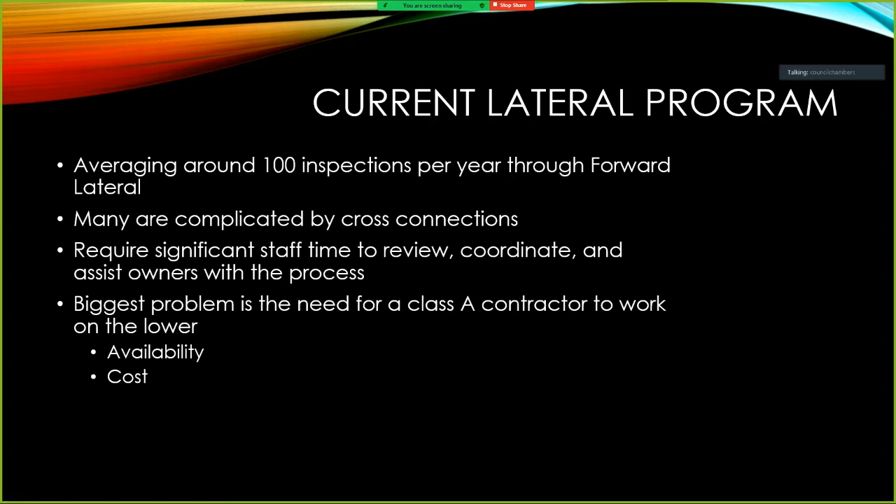So we do have a lateral loan program where the city has been assisting with the costs of replacing the lateral. That applies to both the upper and the lower. It's currently a 2.5% interest rate, 10,000 max, and a 10-year term.

With the recent cost increases, there are times where that's not covering the costs. I've seen lower laterals through the Class A contractors as high as 27,000. Now that was a fairly long lateral, and it very much depends on retaining walls and what's in the way, and the depth, and all of those sorts of things. But combined upper and lower lateral, in some instances 10,000 is not covering it.

We've also done what's called an annual aggregate project, where we basically tell folks, okay, you have to replace your lateral, but the lower, we understand it's a big cost. What we'll do is we'll put your name on a list, and then when we get enough of them together, we'll bid it as a city project, the hope being that we get some economy of scale, and that maybe by bidding a whole bunch of them, we could pull a contractor from out of the area that can do pipe lining.

Or maybe we already have a contractor in the area doing main work that we can sort of tack that onto their project and get a better cost than the homeowners would get going individually to a contractor on their own. We did that once. It did yield some benefits, so that model does seem to work. But it does require a lot of coordination and getting everything squared away and making sure that everything gets paid at the end when it's all done.

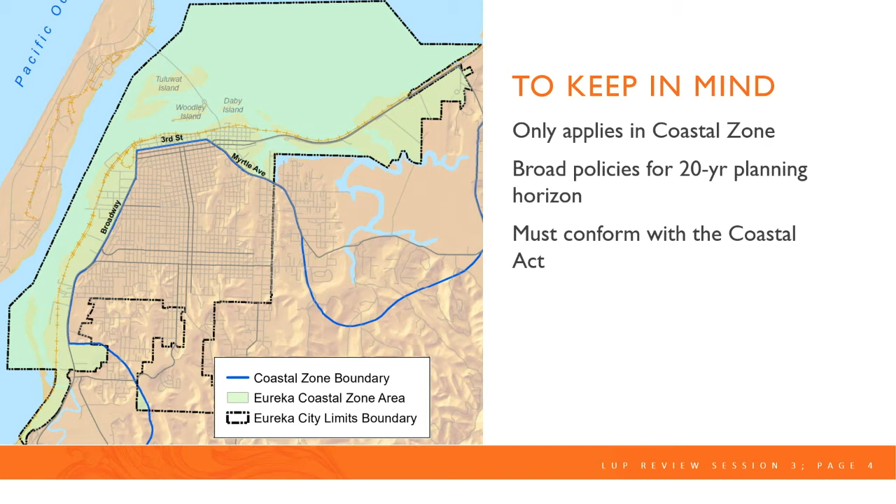Staff is proposing 6 sections in this chapter, and there's a lot of policies, so I'm just going to cover some key highlights. The first section is water quality and hydrology. In the general plan, the goals are what we would like to see; they answer that question: protection, enhancement, and restoration of water resources, as well as improvement of water quality. This is a duplicate goal that's already in the natural resource chapter of our general plan.

We got comments back from Coastal Commission staff in review of the chapter, and they wanted us to incorporate Coastal Act policies directly about marine resources and water quality. So we did that. They also told us we needed to add stormwater control policies. We couldn't just cite consistency with the state MS4 permit and our existing city stormwater ordinance, and I can explain the reasoning for that.

We added draft policies to address stormwater, and they have model policies that they wanted us to add that are really long. So we kept the substance of them, but we made them more like general plan policies, to keep the details for the coastal zoning code.

The second section is about environmentally sensitive habitat areas, implementing Coastal Act Policy 30240, which has two parts. The first part is basically limiting any development in an environmentally sensitive habitat area to uses dependent on the resources of the habitat area.

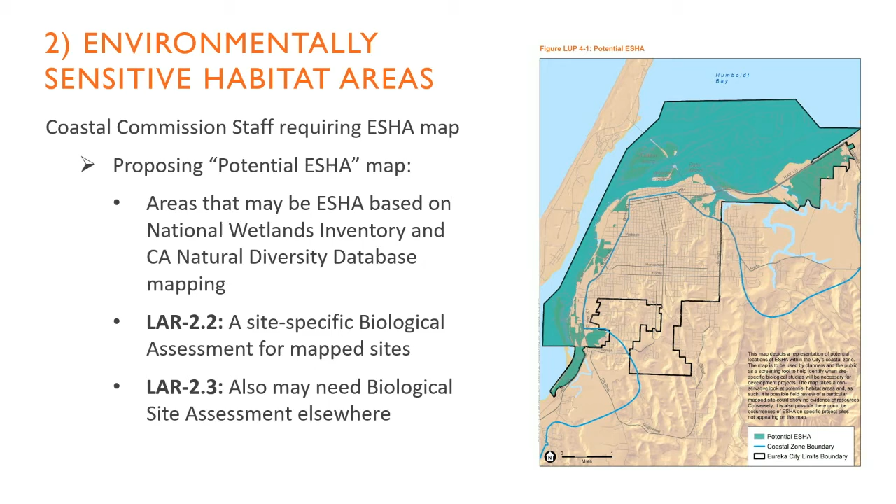The second part of 30240, that policy of the Coastal Act, talks about development near ESHA, and it says it shall be sited and designed to prevent impacts which would significantly degrade the habitat. That's where all the buffer policies come from on the coast, where you have to buffer from habitat. So there's not actually a buffer number, minimum open space buffer requirement in the Coastal Act. It just says you shouldn't degrade the area, and that's the criteria.

So we've included that language, and we're proposing to keep our existing buffer policy, which says you need a 100-foot minimum buffer from ESHA, but it allows further reduction with a site-specific analysis and mitigation, demonstrating that you're not going to degrade the habitat area. I've worked with a lot of buffer policies, and I think Eureka's is good because it has this restrictive standard, but then it allows further flexibility with expert analysis.

Also, the Coastal Commission likes to see a policy about allowed uses in ESHA buffers, and we're proposing just to say anything's allowed in ESHA buffers that meets that 30240 threshold of not significantly degrading the area, and then leaving the details to the IP, to the Coastal Zoning Code, to allow more flexibility.

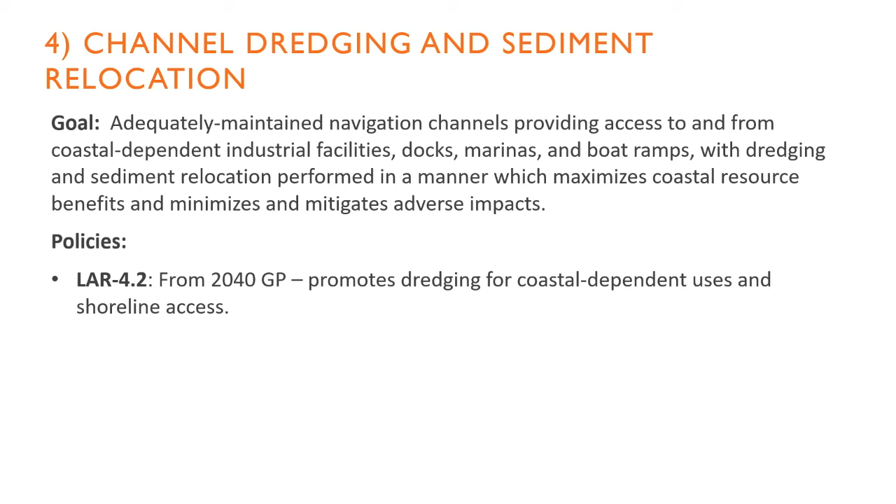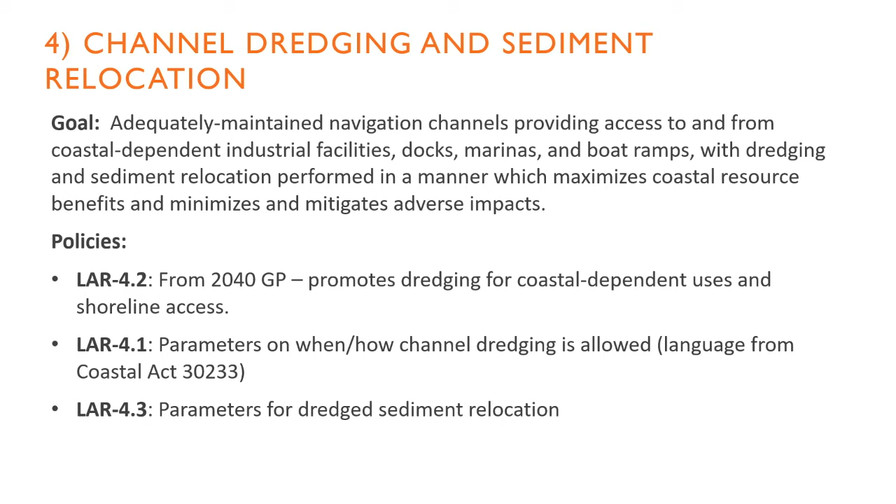The fourth section is about channel dredging and sediment relocation, with 3 policies promoting dredging of navigation channels, plus parameters for when and how channel dredging is allowed, and parameters for dredged sediment relocation.

The 5th section is about cultural resources. It implements Coastal Act Policy 30244, which requires reasonable mitigation measures where development would adversely impact cultural resources. We're adding a policy to implement that, but proposing a more protective one that talks about avoiding cultural resources whenever feasible, and minimizing and mitigating impacts to the maximum extent feasible rather than just reasonable mitigation measures.

There are also a bunch of policies already in the 2040 general plan that we're proposing to duplicate in this coastal element, plus one additional policy about when pre-development archaeological surveys may be required, or construction phase excavation monitoring.

The sixth section is on scenic and visual resources. It implements Coastal Act Policy 30251, which states in part that permitted development shall be sited and designed to protect views to and along the ocean and scenic coastal areas.

The introduction to this section lists scenic resources in the city, both natural and built. There's a policy about protecting views of scenic resources from public vantage points, a figure identifying protected views from the coastal trail, and another figure identifying protected view corridors along the northern waterfront down streets. Those mapped protected views are then held to a higher standard.

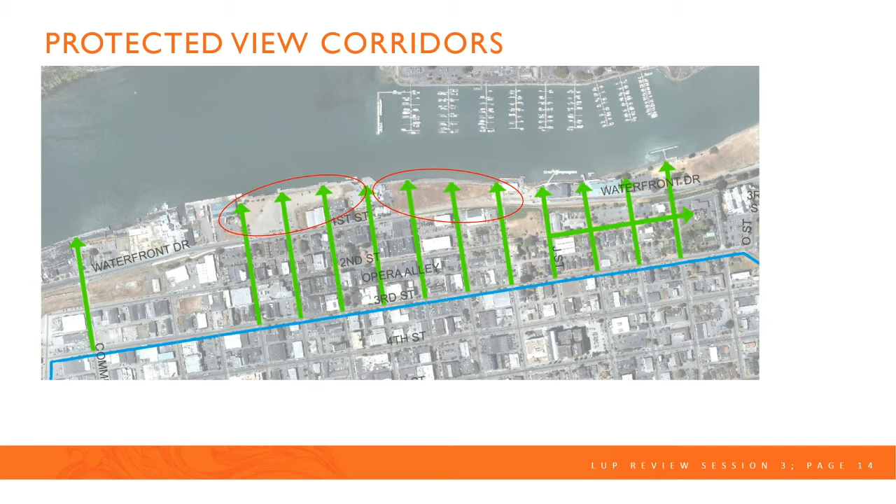The draft map of protected view corridors will impact redevelopment of C to F Street and the Union Pacific site, because they'll have to avoid affecting those view corridors if council decides to adopt this policy.

We're also bringing forward tonight the draft figures from the public access and recreation chapter, including figures showing existing and proposed public access and recreation facilities, and existing and proposed bicycle facilities. Unfortunately the timing is poor because we're about to go through a public input process for a bike plan, so we anticipate updating this map afterward, but it will take a while to get certification from the Coastal Commission, so it might work out that they end up on the same track.

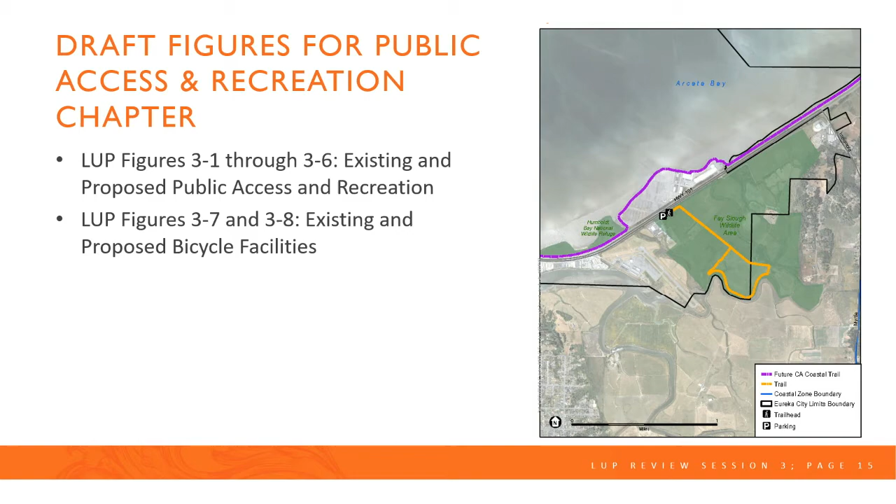I want to thank Senior Planner Riley Toplewski for preparing these maps for us. That's my presentation.

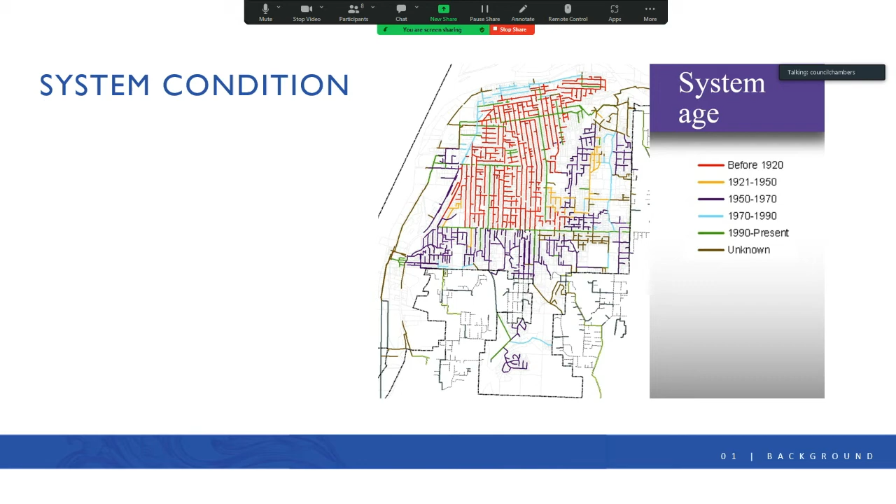So just a little background on the system condition. Most of our system is 100 years old-ish. Take this with a grain of salt, but all of the red was built before 1920. That gives you an idea of the magnitude of capital improvements that if we were going to bring everything up to snuff today, how much we'd be looking at. There's a lot of projects there, and that's true of both water and sewer.

Going through the COSA, or the cost of service analysis, just a little bit—looking at what the rates are composed of, what goes into the utility rates, and what people see on their bill. Usually you're going to see a base rate. That's the amount you pay every month on your bill. It doesn't generally change. It's different for every customer class, and it's irrespective of the water use—no matter how much water you use, the base rate is going to be the same. It's mostly made up of fixed costs, things that don't change: the cost of staffing, insurance, vehicles, building overhead, and everything else that doesn't vary with the amount of water you produce or sewage you treat. That's mostly what goes into your base rate.

That's usually where you want most of your revenue to come from because it's incredibly stable. If you have a drastic conservation effort and everybody saves a bunch of water, that's great, but from a revenue standpoint that's not great, because then you have fluctuating revenues over time that may change with seasonal conditions or other things. So the base rate is nice and stable, and you want to get a good amount of revenue from it.

The volumetric rate is usually things that are variable with the cost of producing water or treating sewer—things like water purchase, electricity, chemicals, etc., that actually vary with the amount of water you treat. Those are what go into the volumetric rate, and those can vary over time. If people conserve, they're price elastic to a point—if the cost goes up, people will use less.

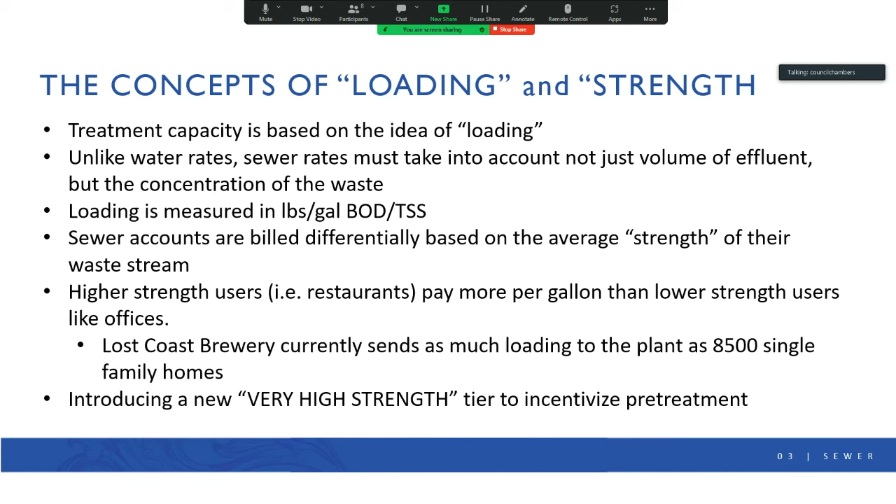The idea of strength becomes a very important part of this when you look at the cost of service analysis. So one of the things we're looking to do there is implement an additional strength tier. Currently we have low, medium, and high strengths based on the loading. Implementing another strength tier will help incentivize pretreatment, which will free up capacity at the plant. So we can come back to that if there are questions about it. I realize this is fast, and those are fairly complicated concepts.

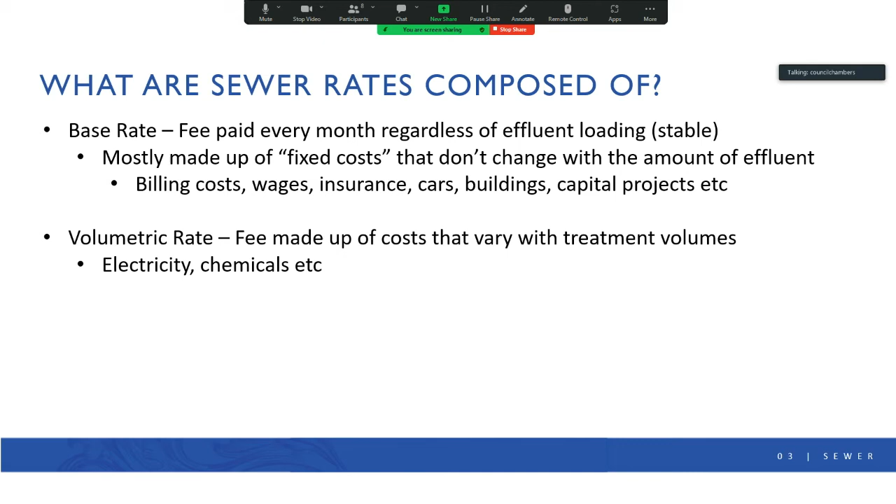So the sewer rates are composed much like the water rate of the base rate, which is revenue stable - it's paid every month, it doesn't change with the volume, it's mostly fixed costs. And the volumetric rate is made up of costs that vary with treatment volume, and it's also dependent on strength, so strength is the other factor there.

So on the sewer side, things that have changed between the last 5-year period and this 5-year period: the net revenue requirement is up 33%. O&M expenses are up about 1%. You can see that difference when water was going up fairly substantially - that wasn't us paying people a lot more or insurance going up drastically, it's mostly in the cost of water purchase. So sewer is staying fairly static in that regard.

Capital expenses on the sewer side are up 81%, not going up as drastically as water because they went up drastically last time. If you remember back to the last rate period, sewer rates went up on the order of 100% over 5 years - that was a big hit. Because that hit was taken in the last period, I think that's sort of buffering this go around.

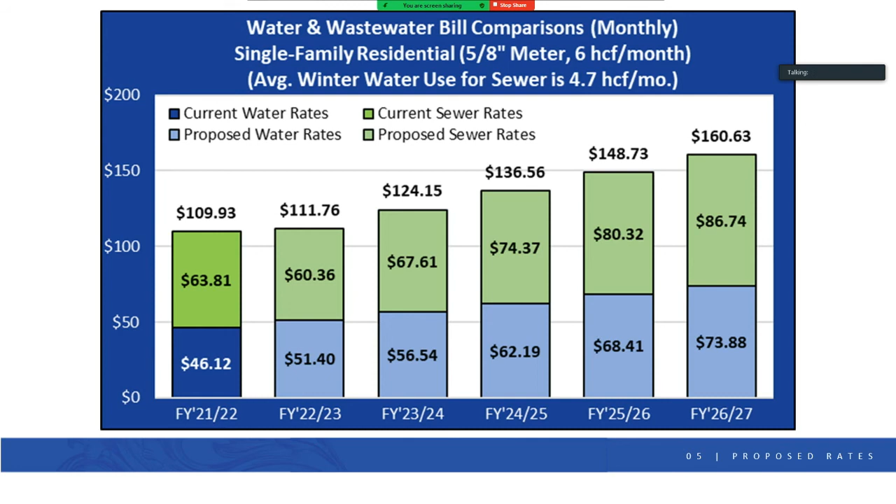So that's kind of the overall look at this. I know I covered a lot very quickly, and rates are fairly complicated, so I'm happy to answer any questions you have.

Do we have any questions in preparation for the hearing? Councilmember Arroyo?

I don't have a question at this time. I just wanted you to know that I was here. Okay, thank you. Councilmember Castellano?

Sure, I have a question, just a point of clarification. I understand the idea that rates need to pay for expenses, and we're mapping it out over 5 years. Many of those expenses, like new meters, will hopefully last 20 years or something like that. Are those rates specifically paying for the meters over the next 5 years, or are we anticipating a 20-year cost for those?